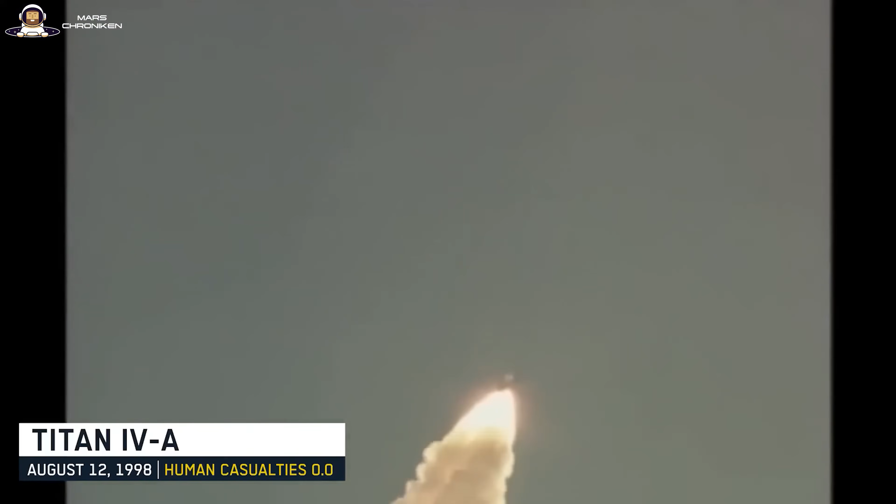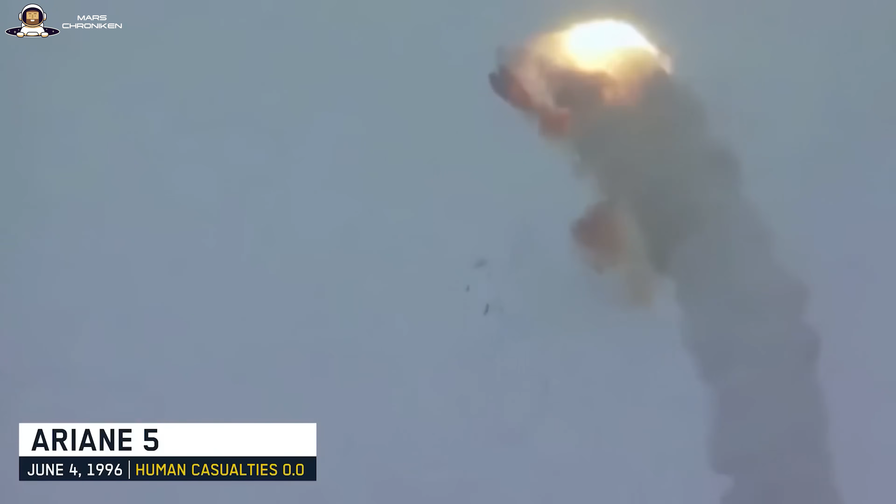If a rocket engine detonates during flight, the mission is usually over. Period. For over 80 years, propulsion engineers have built their careers on this very principle. Combustion chamber instabilities nearly brought down the F1 engine of the Saturn V in the early 60s. Combustion oscillations have destroyed the European Vulcain engines. Thermoacoustic combustion instabilities are the nightmare topic of every thesis at the DLR in Lampoldshausen.

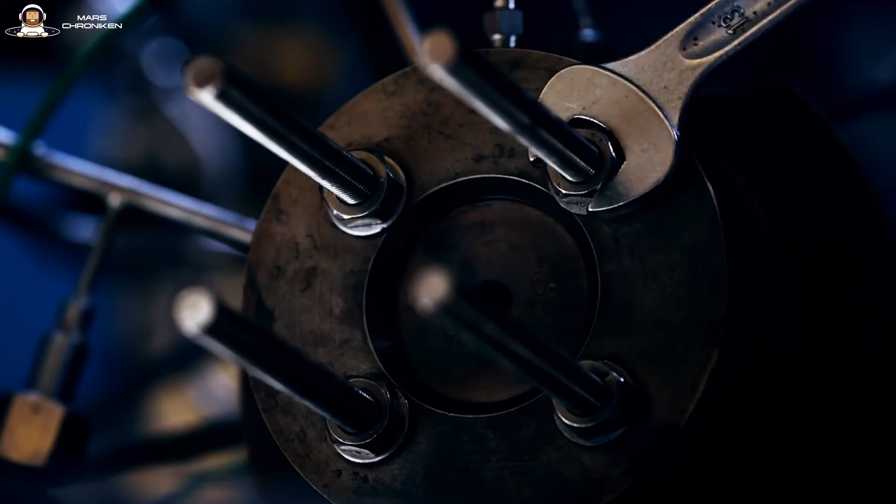If your combustion chamber pressure suddenly jumps by a factor of 20 and the whole thing becomes a pressure wave, then your engine is in 1,000 pieces on the test stand and you have to explain to your supervisor why.

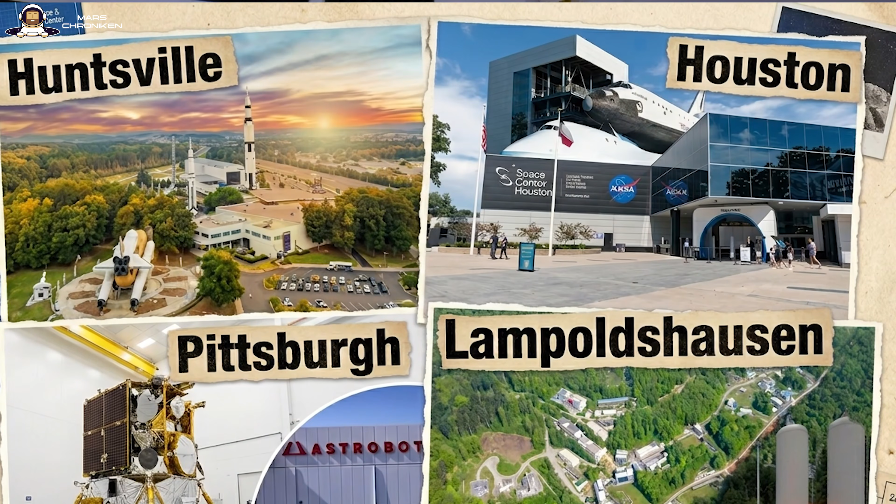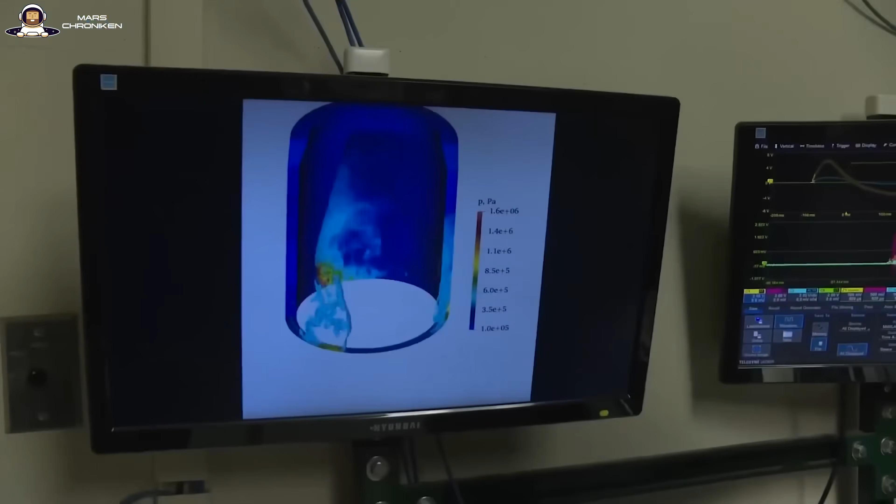And yet today, from Huntsville to Houston to Pittsburgh and Lampoldshausen, some of the best engine engineers in the world are working in front of their screens on rocket engines that keep exploding, and it's completely intentional. With a detonation frequency in the kilohertz range, several thousand shockwaves per second, cleanly circulating in an annular combustion chamber with a diameter of just 68 millimeters. And it works. The technology that the rocket industry wanted to avoid at all costs for 80 years is now well on its way to becoming the most efficient propulsion system of the next decade. And it's coming faster than most people think.

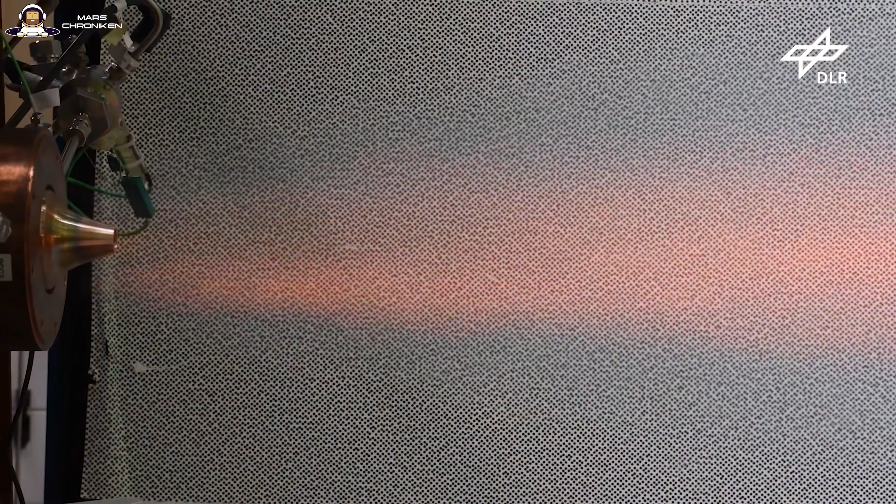In April 2026, just a few weeks before this recording, a single prototype exploded continuously for 300 seconds without taking any damage. A few months ago, the DLR became the first institute in Europe to operate such a detonation combustion chamber with real liquid oxygen and hydrogen. And in May 2025, for the first time in the United States, a rotating detonation engine actually flew.

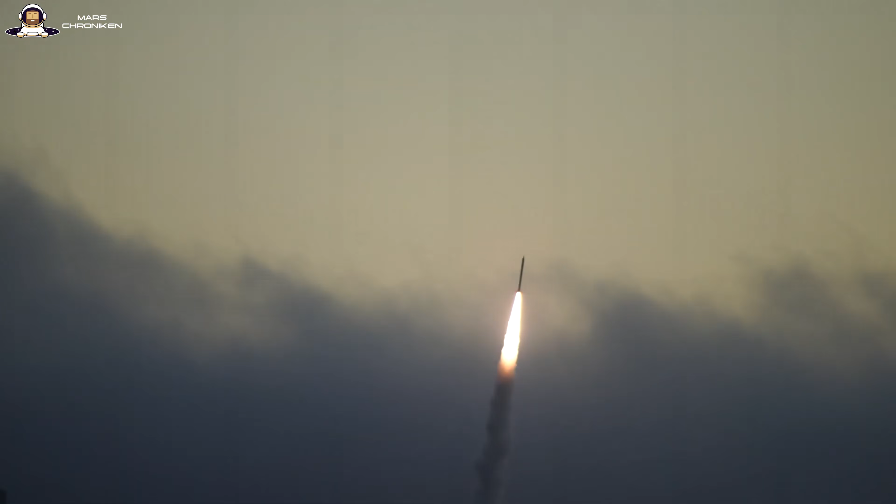Today we're talking about what scientists have considered the supreme discipline of chemical space propulsion since 1959, and what, until a few years ago, no country was able to fully control. We'll dive into the technical details. We compare what the Americans can do, what the Germans can do, what the Japanese have done, and what the Chinese claim. And in the end, I ask the question that really matters, not whether this technology works, but who will fly with it. My name is Serwin, and this is Mars Chroniken.

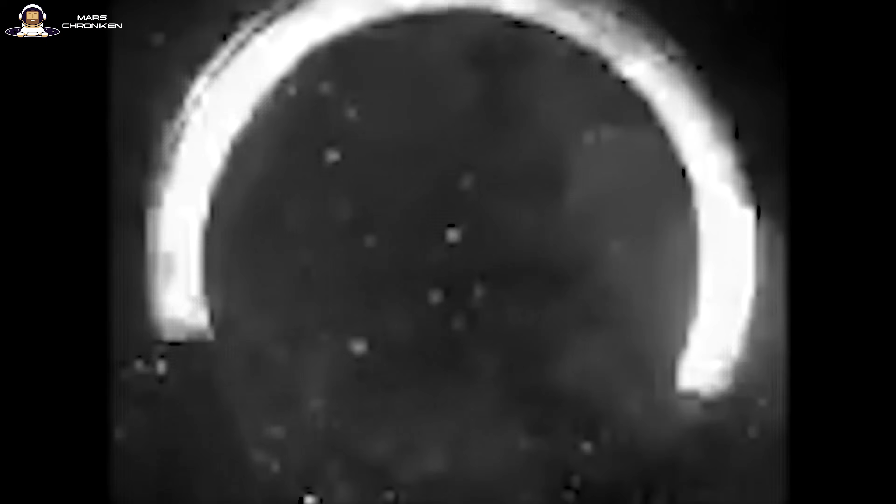The story doesn't begin in Lampoldshausen and not in Cleveland. It begins in Akademgorodok at the Siberian Institute of Hydrodynamics in 1959. A Soviet fluid physicist named Bogdan Voitsekhovskii observes something that should actually be impossible. He manages to get a detonation wave to continuously circulate in a ring-shaped chamber. Not just ignite and dissipate like in a pulse detonation engine, but actually circulate continuously. A quasi-stationary shock that approaches itself, igniting the fresh mixture at the next moment of its own circulation.

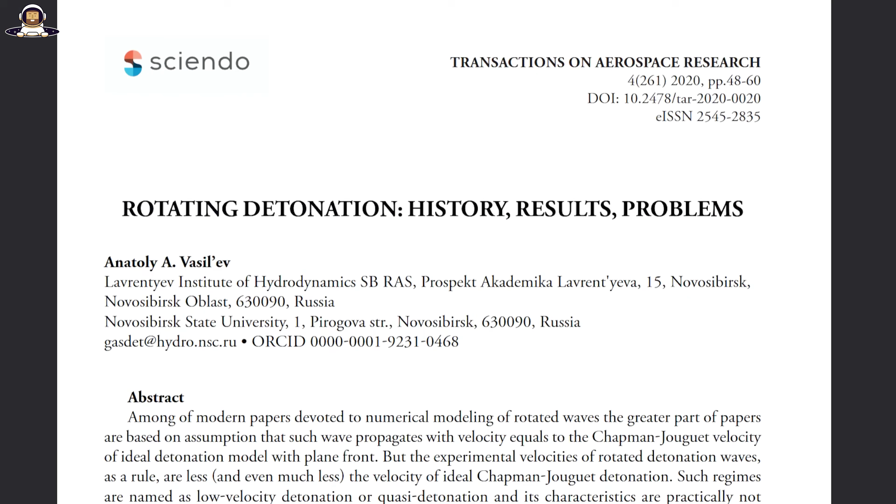The mathematics behind it is fascinating, but the practice is hell. Voitsekhovskii publishes his observations, and for the next 60 years, research groups in Russia, the USA, Japan, Poland, and Germany try to build a working engine based on these observations. They fail. Not just a little, but completely. The detonation dies out. The wave breaks up into deflagration, or the combustion chamber melts. On top of that, the sensors are too slow to understand what's actually happening.

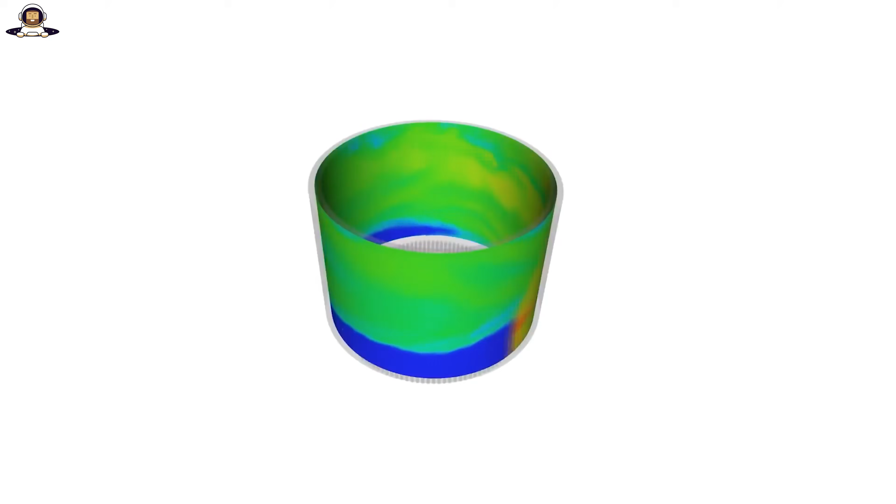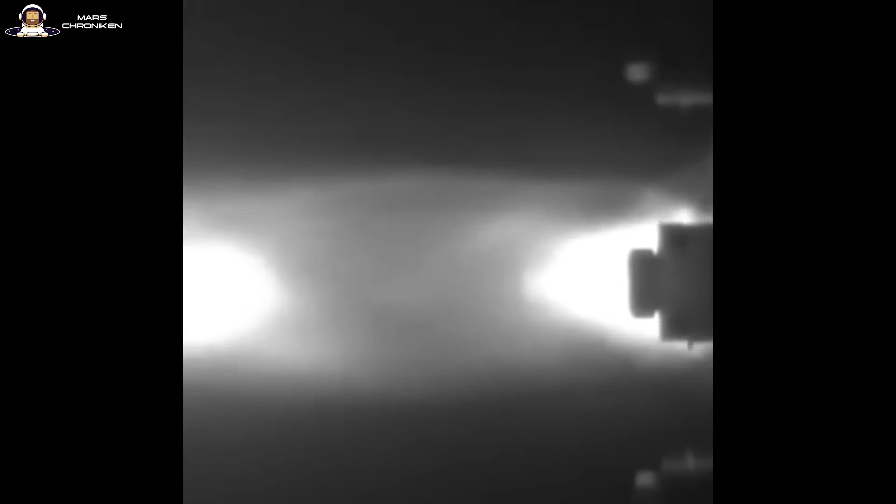High-speed cameras from the 60s could maybe manage 1,000 frames per second. But a modern RDE wave travels around the combustion chamber at several kilometers per second and reaches frequencies in the kilohertz range, in extreme cases up to 100 kilohertz. You need 100,000 images per second just to see what you've actually burned there.

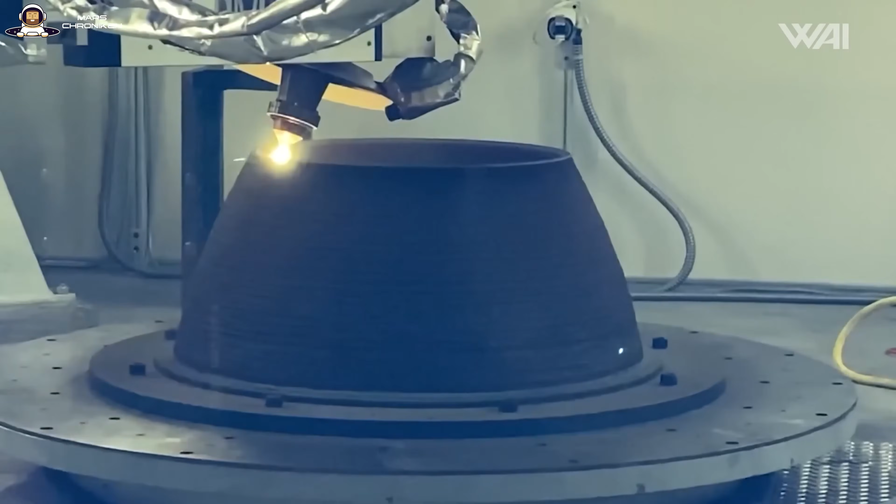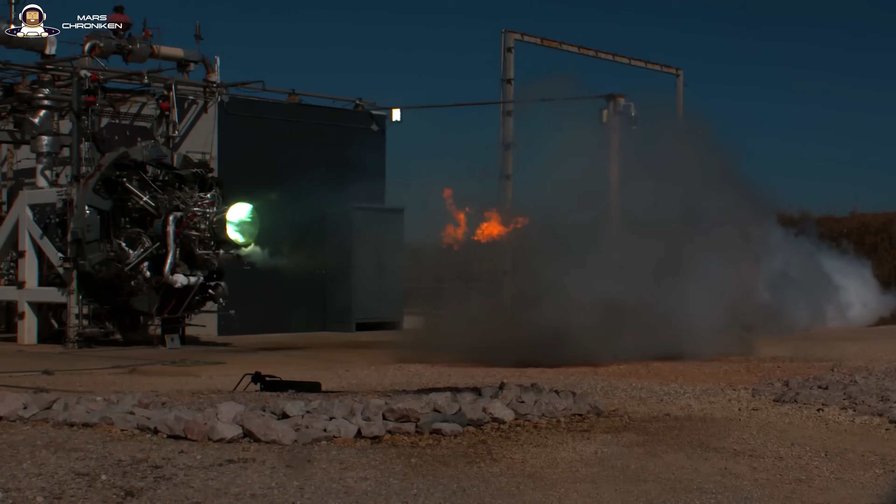It's only in the last 10 years that the game has changed. Three things have happened. One, additive manufacturing, that is, 3D printing in copper alloys and Inconel, which makes it possible to produce such combustion chambers in the first place. Two, new high-frequency pressure sensors that resolve up to 4 megahertz, meaning a pressure reading every 250 nanoseconds. Three, high-speed cameras that no longer blur at 180,000 frames per second. And suddenly, a phenomenon that could only be inferred indirectly for 60 years can actually be observed, measured, and controlled.

Before we take a look at the players, we need to clarify one thing. Why go through all this trouble in the first place? What is so appealing about an engine that is constantly exploding? The answer lies in thermodynamics.

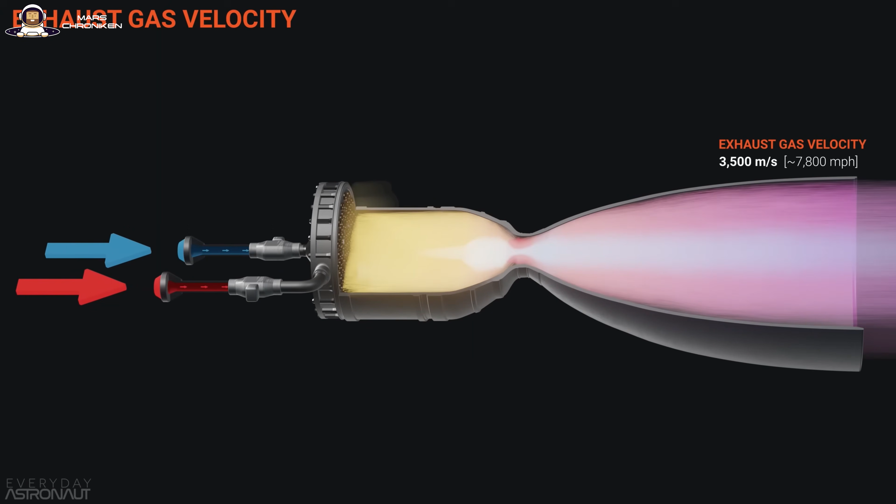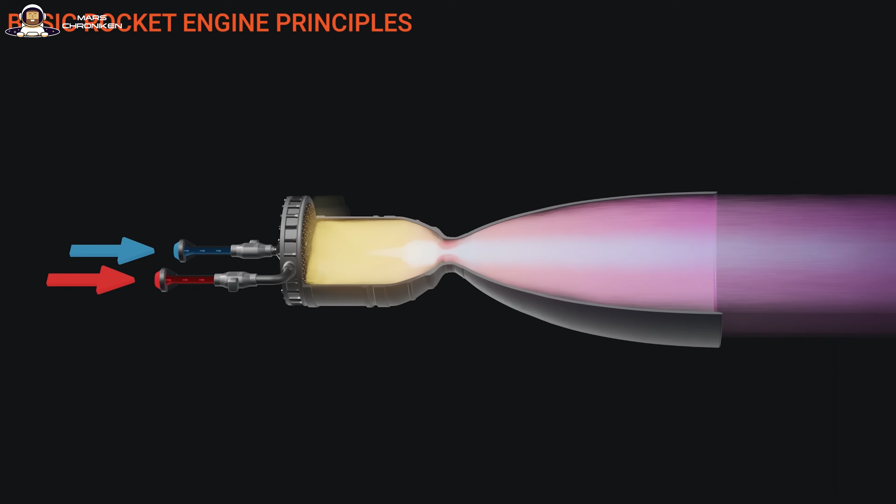A normal rocket engine, meaning everything you've ever seen in a Falcon 9, an Ariane 6, or a Saturn V, operates with deflagration. That's a controlled combustion in the subsonic range at more or less constant pressure in the combustion chamber. The propellants are injected, mixed, ignited, and they react. And the pressure with which everything shoots out of the nozzle at the back is essentially the pressure with which the turbopumps push the stuff in at the front. In fact, you even lose a bit of pressure along the way. That's physically correct, but it's not the maximum.

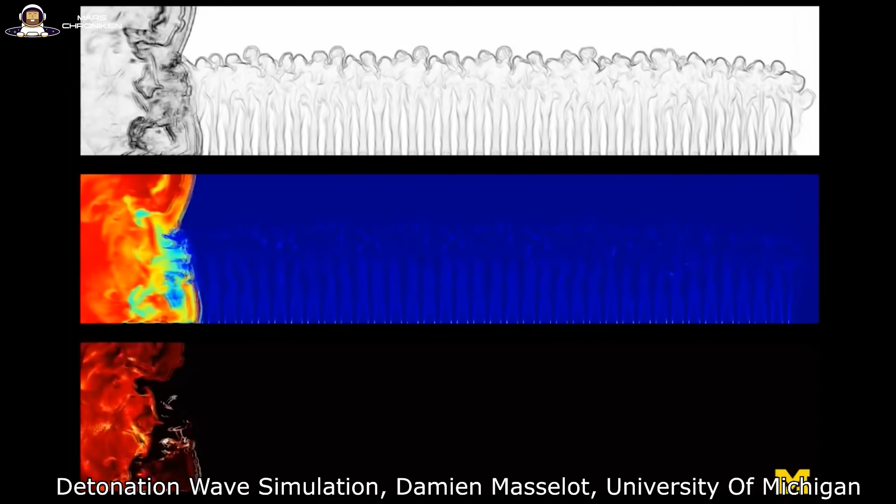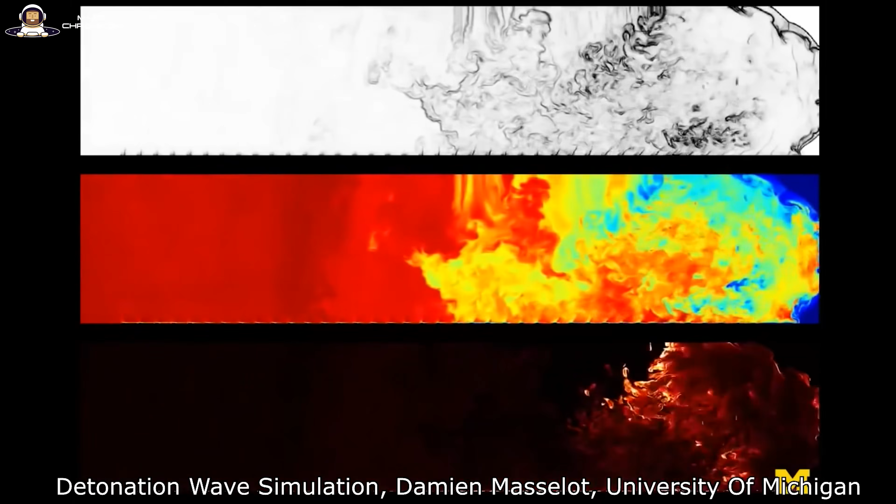A detonation is something different, namely a supersonic shockwave-driven combustion. The flame front moves faster than the speed of sound in the unburned mixture. And that has a crucial consequence. While in deflagration the pressure remains constant or drops slightly, detonation actively builds up pressure.

You gain pressure through combustion. In English, that's called pressure gain combustion. And that's exactly the promise. A rotating detonation engine, or RDE for short, or in the rocket context RDRE, practically captures this pressure gain.

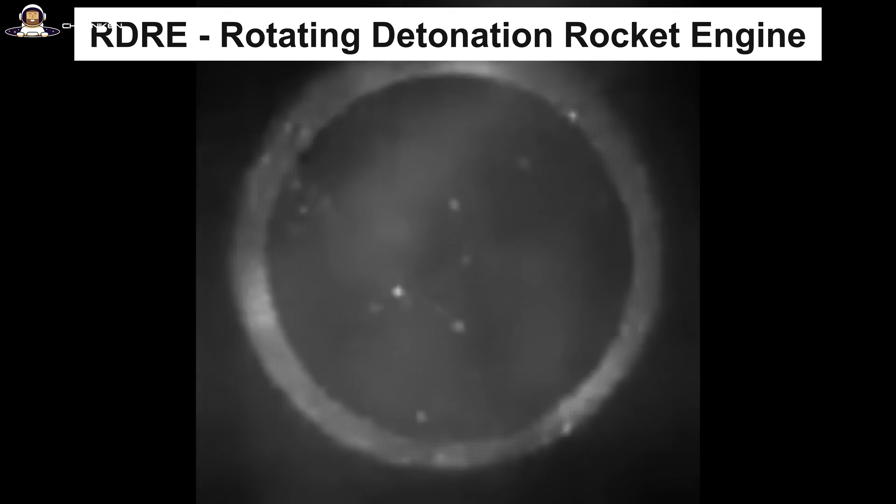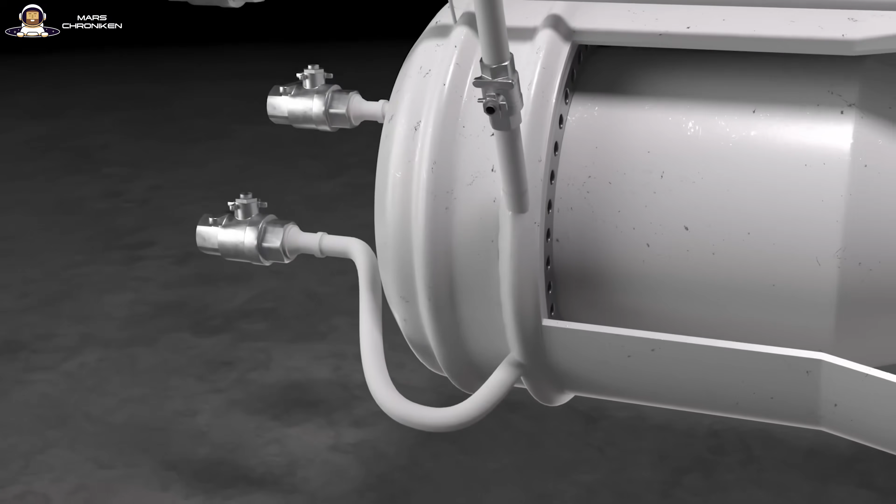The combustion chamber is an annular gap, two concentric cylinders with a few millimeters of space in between. On one side, the propellants, typically hydrogen and oxygen or methane and oxygen, are continuously injected. You ignite it once externally with a so-called pre-detonator. And if everything goes right, a detonation wave starts and circles around in the annular gap several thousand times per second. Every time it passes a spot, fresh fuel mixture has accumulated there, which is ignited by the passing shockwave, feeding and sustaining the wave.

Hot, highly compressed gas comes out at the back and is expelled through a nozzle to produce thrust. Sounds crazy? It is. But the theoretical increase in efficiency is tempting. A much-cited study, led by John Bennewitz at the Air Force Research Laboratory and published in Scientific Reports in 2023, estimates the realistic gain to be on the order of 10% more thrust with the same fuel consumption.

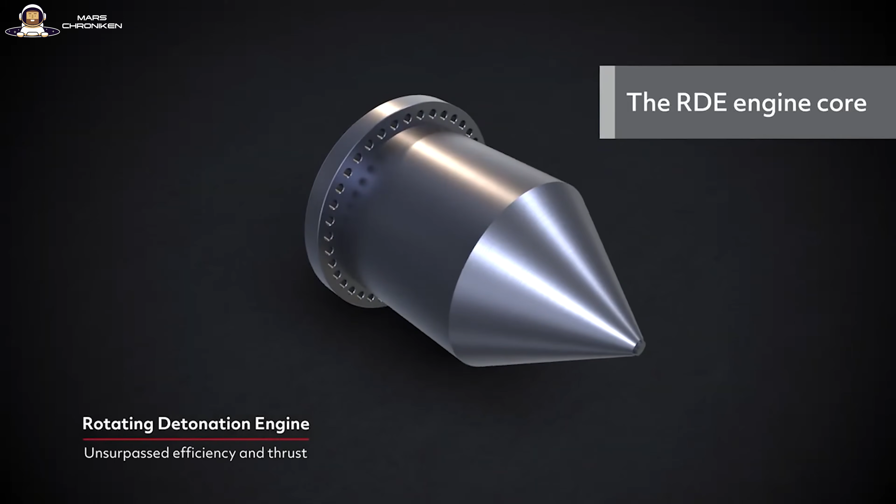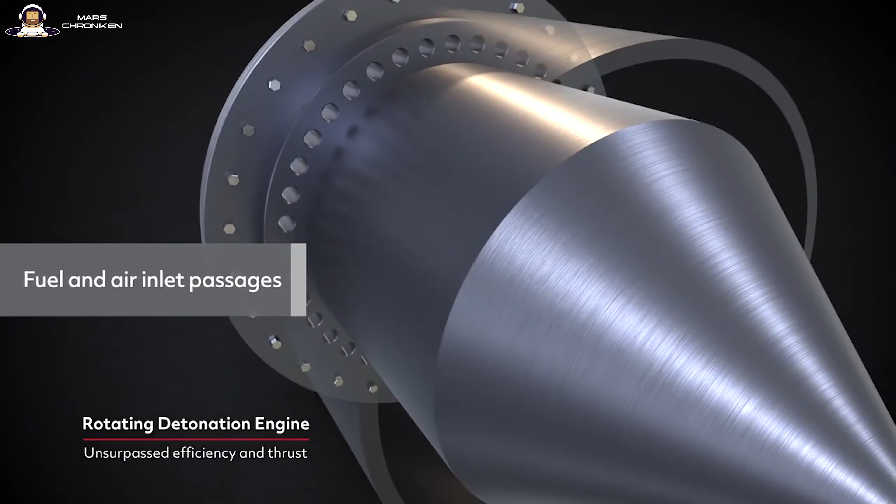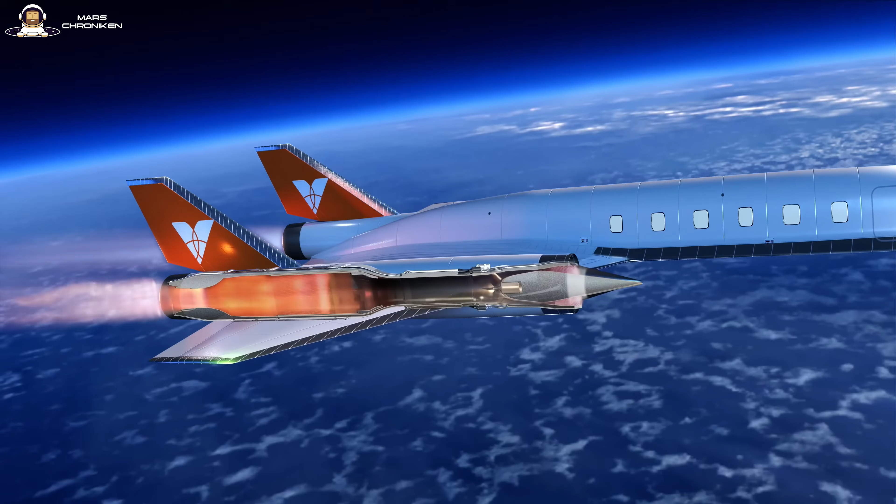In addition, there are smaller combustion chambers, lower required injection pressures, less susceptibility to classic combustion chamber instabilities, and a significantly smaller construction volume. In a world where every kilogram in the tank and every cubic centimeter of combustion chamber costs money, that's tempting. And if you combine that with a ramjet, which is an air-breathing jet engine for hypersonic flight speeds, then suddenly you not only have a better rocket engine, but also the theoretical key to a passenger jet that accelerates from a normal runway to Mach 6.

A small company from Houston, Texas is working on building exactly that. We'll get to that in a moment, but the first to show that these detonation rings actually work in reality weren't NASA, but the Japanese.

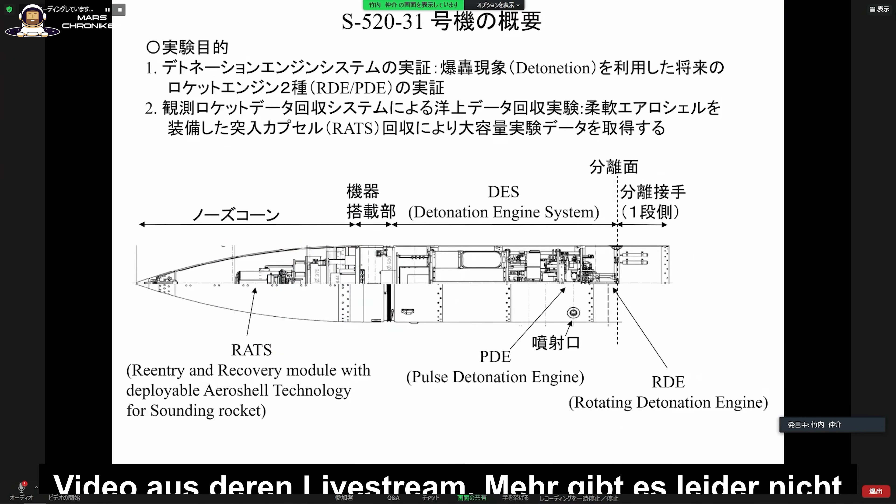On July 27, 2021 at around 5:30 a.m. local time, an S-520 sounding rocket was launched from the Uchinoura Space Center on Kyushu Island. A configuration with classic solid fuel in the first stage. But in the upper section, there's something new: a detonation engine system built by a research group from Nagoya University, together with Keio University and the Muroran Institute of Technology, led by detonation physicist Jiro Kasahara.

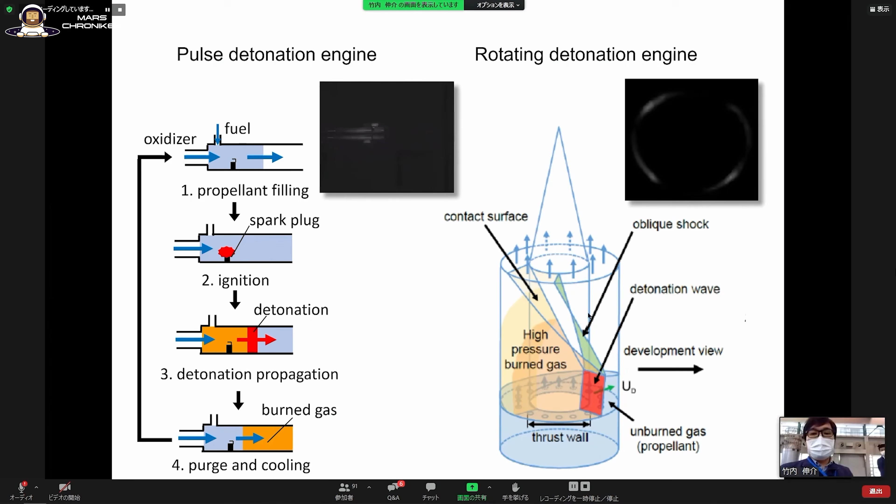After the separation of the first stage, the crew ignites the rotating detonation engine in actual vacuum. Methane and oxygen, gaseous, 6 seconds of operation, about 500 newtons of thrust. Pressure data, temperature data, and even video recordings are sent to Earth via telemetry and recovered from the Pacific using a small return capsule called RATS. It's the world's first detonation engine ever to run outside the atmosphere.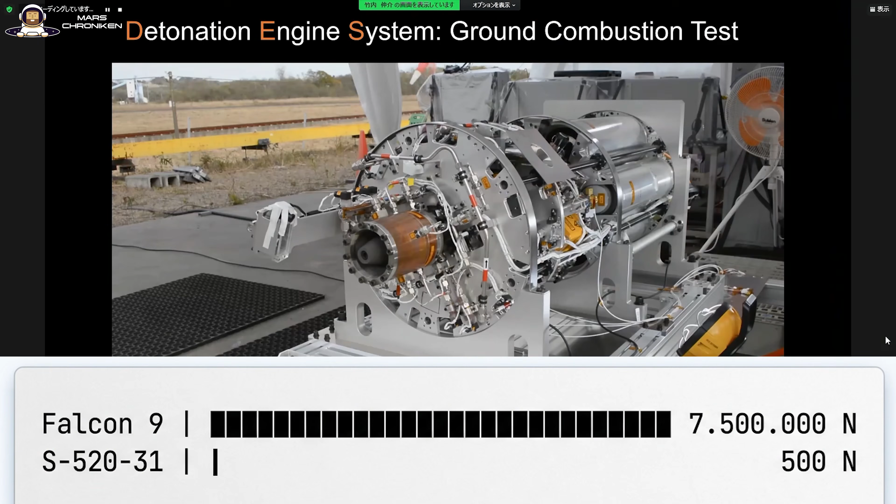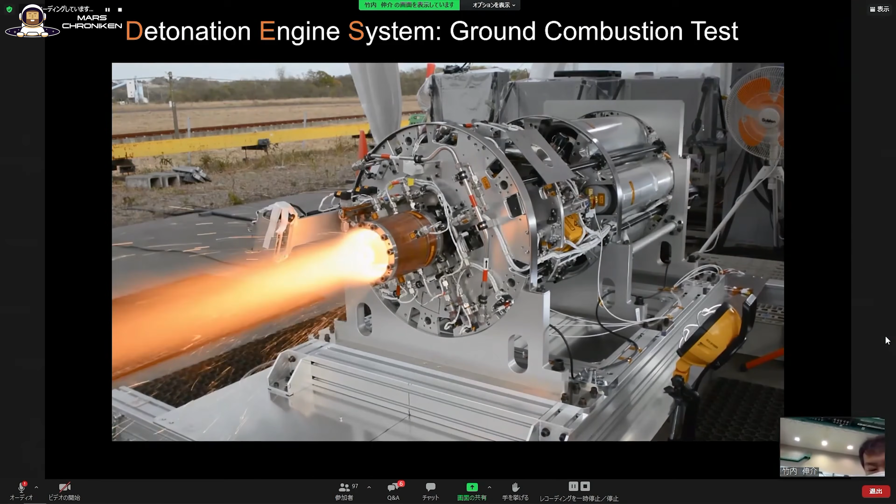500 newtons isn't much. A Falcon 9 has a total of 7,500,000 and many times more thrust than the Japanese experiment. But that wasn't the point. The point was to show that the physical principle works in space. That's very typical for Japanese spaceflight: quietly, thoroughly, without a PR machine, but technically they're right at the forefront.

The Americans took longer, but then they came with force.

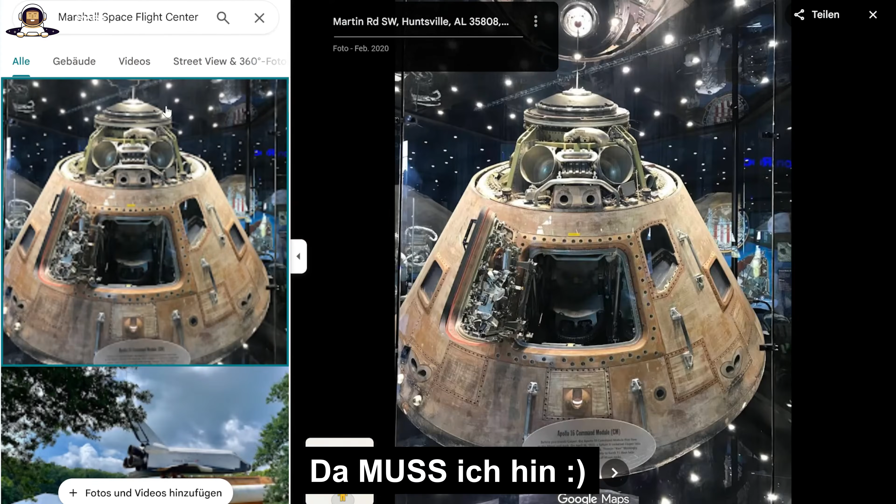Let's continue. The center of NASA activity is the Marshall Space Flight Center in Huntsville, Alabama. At the center sits a combustion devices engineer named Thomas Teasley, who leads the RDRE test program, funded through the game-changing development program of the Space Technology Mission Directorate. Two tests define the current state of the art in the US to this day.

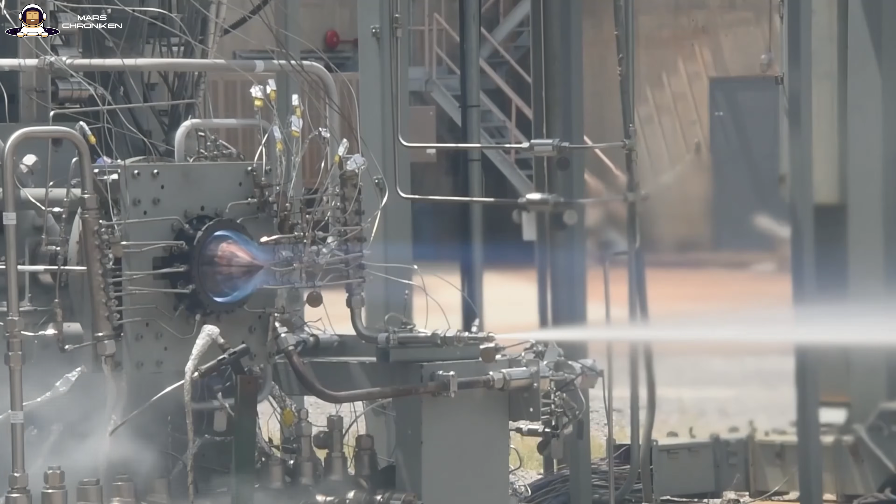The first was in the summer of 2022. A 3D printed rotating detonation combustion chamber made from a copper alloy developed by NASA itself, called GRCop-42, manufactured using the powder bed fusion process in cooperation with InSpace LLC and Purdue University in Indiana. The thing produced over 4,000 pounds of thrust for almost a minute at a chamber pressure of 622 psi. According to Marshall, that's the highest documented chamber pressure for such a configuration. An initial hardware demonstrator result that showed additive manufacturing really is the key.

GRCop-42 is a high-performance copper alloy with excellent thermal conductivity, which through additive manufacturing allows for the geometric complexity required by such a combustion chamber.

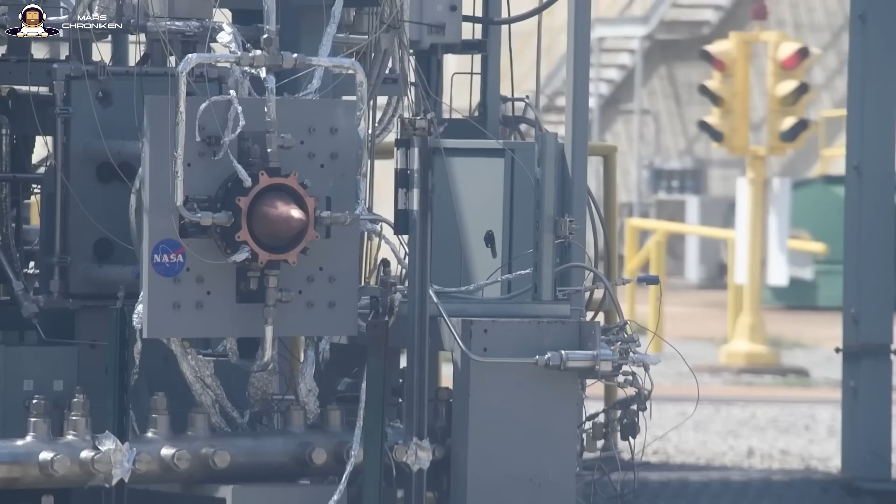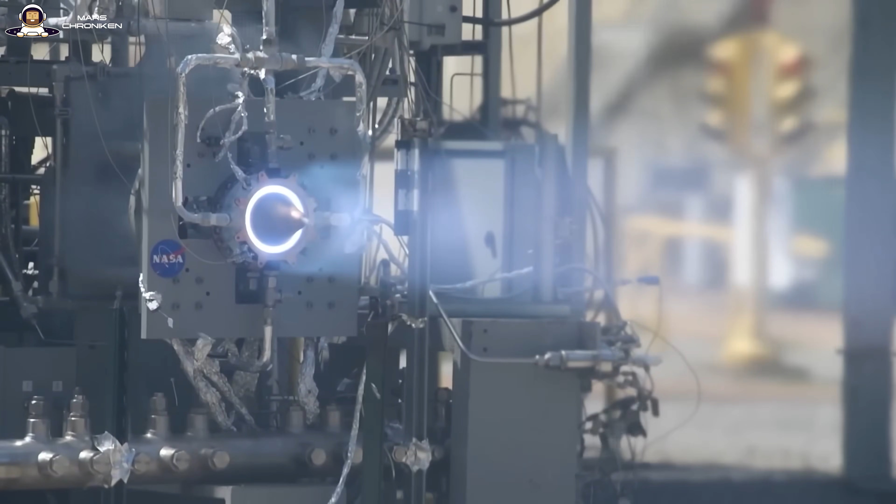The second test was the shocker. On September 27, 2023, Marshall fired the same engine type for 250 seconds, over 4 minutes straight, with over 2,600 kilograms of thrust. That's a burn time profile that roughly matches a typical lunar landing braking maneuver, or a Mars transfer burn. In other words, NASA has demonstrated that this technology is no longer just a phenomenon lasting seconds in the lab, but is now operating at scales where real missions can be conducted.

Meanwhile, the Marshall program is planning the next stage: a technology demonstration mission with a combustion chamber assembly in the 10,000-pound class. That's a bit over 4,500 kilograms of thrust, coupled with a real methane-oxygen turbopump with a gas generator.

That's no longer basic research. That's preparation for a flight-capable propulsion system.

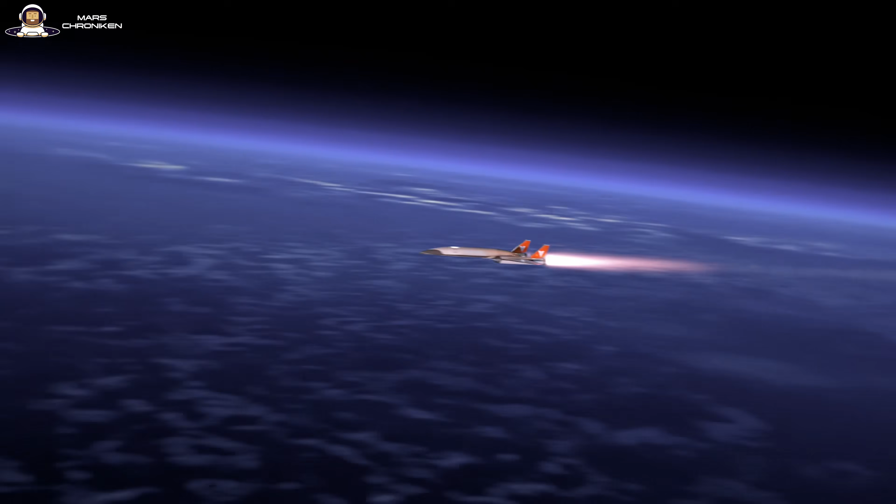Their vision is a Mach 4 passenger jet called Stargazer M4, which takes off from regular airports and connects Los Angeles to Tokyo in under 2 hours. That's ambitious in a way that would have been ridiculed as a pipe dream in the 90s.

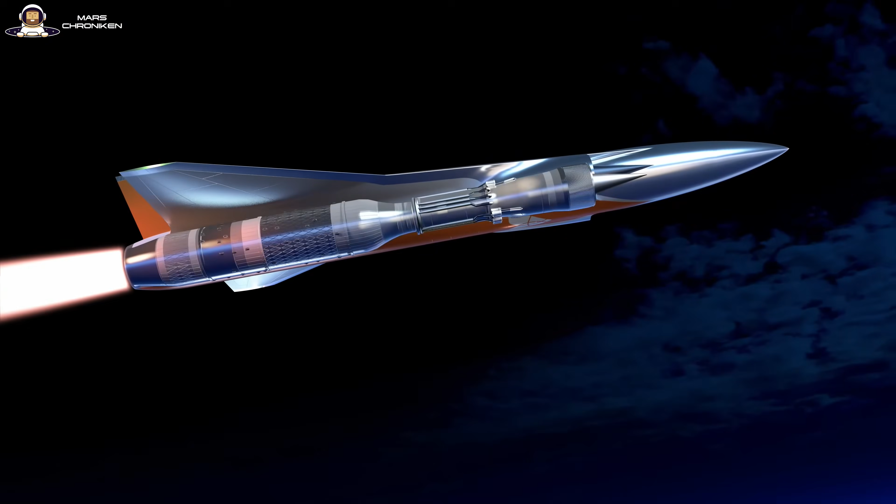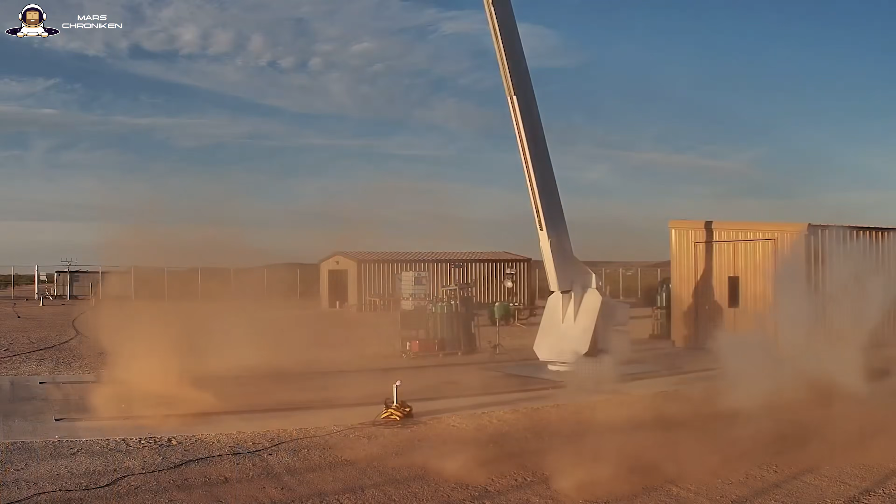On May 14, 2025, they delivered something that no one would have expected just 12 months earlier. Venus Aerospace launched a small rocket with a rotating detonation engine on board from Spaceport America in New Mexico, in the desert south of White Sands. 3 to 5 seconds of vertical ascent, 1,340 meters in altitude, a maximum acceleration of 4 G. And crucially, the engine was recovered almost undamaged after the flight. It was the first flight test of an RDRE in the United States, and according to the company, probably the first such flight ever worldwide, if you exclude the Japanese configuration as a low-thrust research facility.

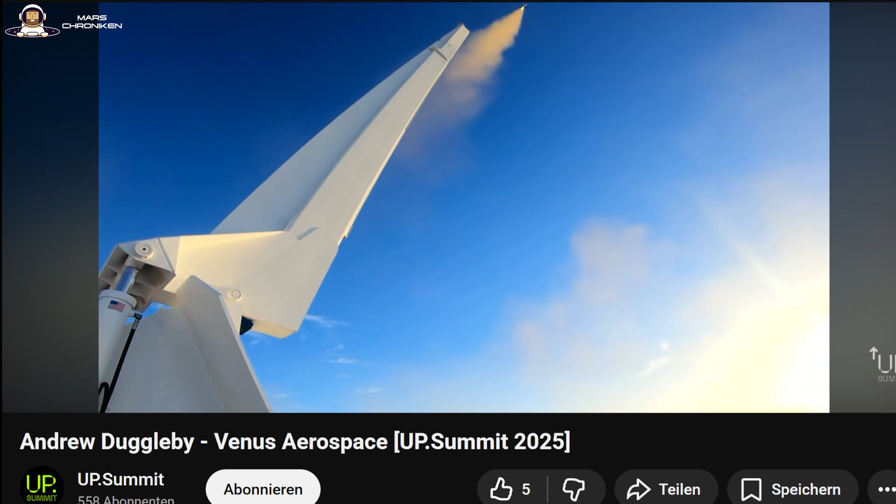This means the detonation engine has finally moved out of the laboratory. Andrew Duggleby, the CTO, said a sentence after the test that will keep the industry busy for a while: essentially, the rotating detonation engine has been a theoretically attractive thrust gain for decades, and Venus has overcome the final critical hurdles to finally realize this theoretical gain in hardware. Whether that's completely true will have to be shown by scaling, but as a vehicle demonstration, it's a milestone.

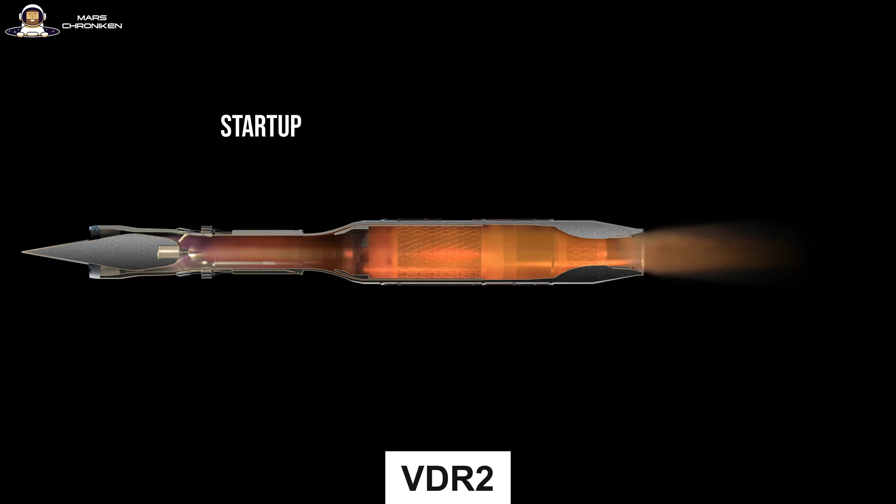Venus itself is aiming to combine it with its in-house air-breathing detonation Ramjet VDR-2, with the goal of a Mach 6 vehicle without an external booster stage. It's still a long way to go until then, but May 2025 was the proof that the core is real.

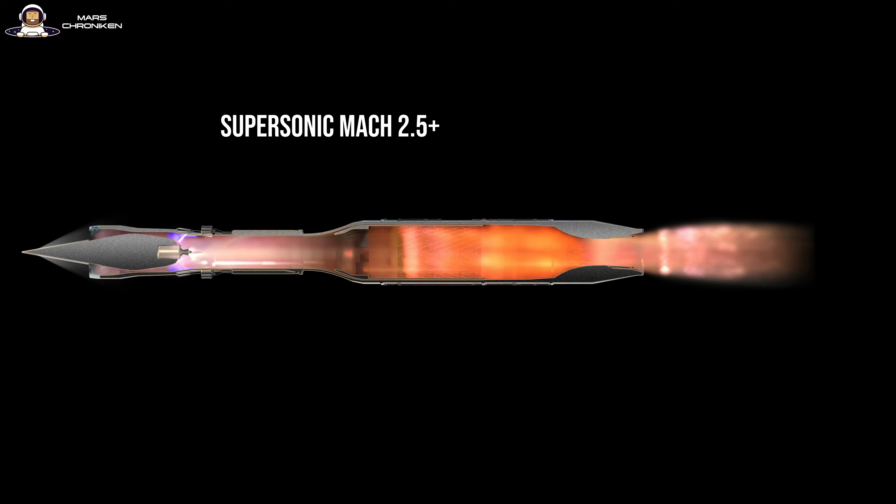You need to know the second private company, because just a few weeks before this recording, it broke a world record.

On April 23, 2026, Astrobotic Technology from Pittsburgh announced the completion of a test campaign at the NASA Marshall Space Flight Center. The engine is called Chakra, named after the disc-shaped throwing weapon from Indian mythology, which is a fitting name considering the ring geometry of the combustion chamber.

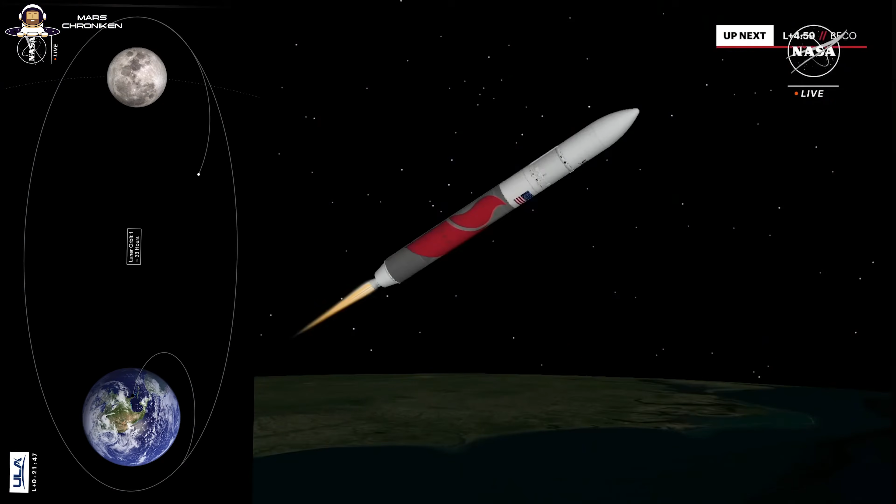Astrobotic is best known for the Peregrine mission. In January 2024, the company became the first US private firm to launch a lunar lander, but the mission failed due to a valve defect in the propulsion system, before Peregrine could even reach the moon. A painful lesson, but it didn't knock Astrobotic out of the game. Instead, they took the outcome as an opportunity to ramp up propulsion development internally.

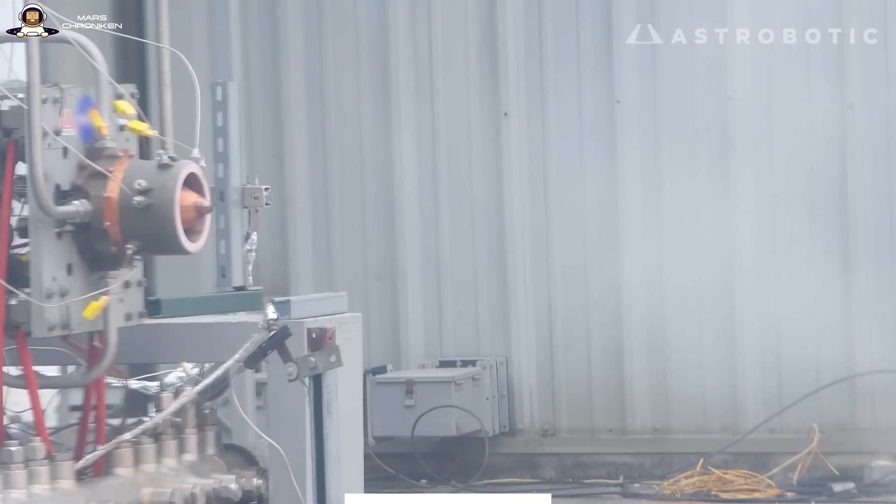Chakra is part of this answer. What Chakra delivered in April 2026 is of a completely different magnitude than anything else so far. Two prototypes have accumulated over 470 seconds of burn time in 8 hot fire tests, including a single uninterrupted run of 300 seconds. According to all relevant observers, including NASA, this is the longest continuous hot fire run of a rotating detonation rocket engine in history.

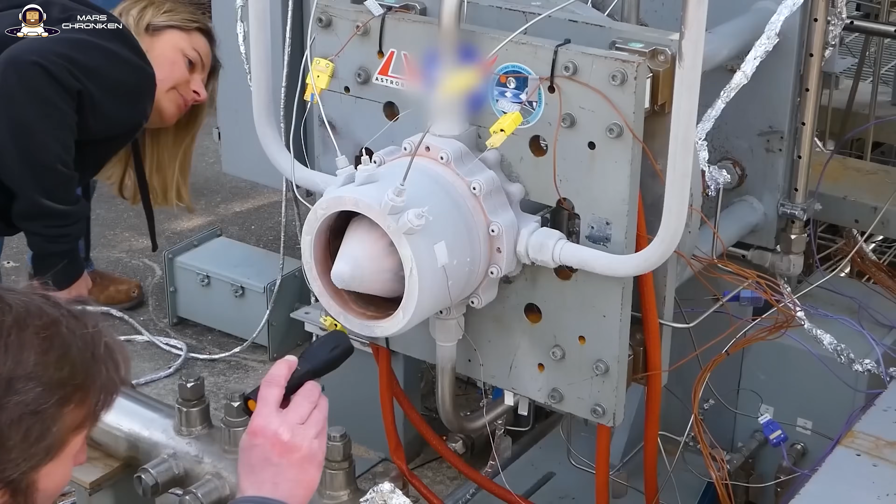Each prototype produced more than 1.8 tons of thrust, and both engines reached what's called thermal steady-state conditions. That means the engine ran long enough for the temperature distribution in the combustion chamber wall to stabilize and stop increasing. That's the thermal equivalent of true continuous performance. After the test, both prototypes were inspected without any visible damage.

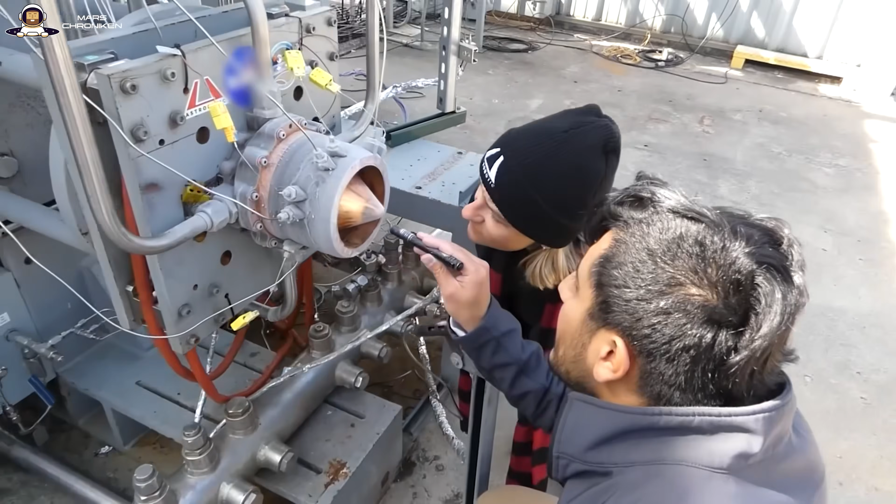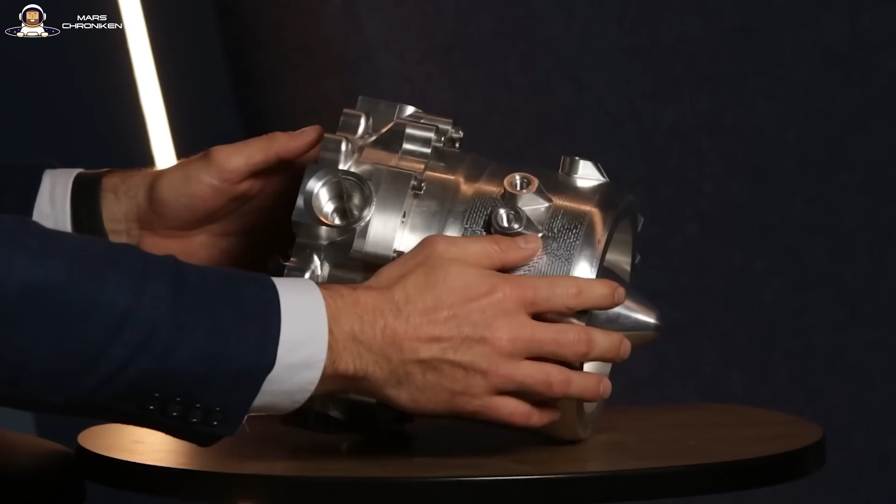Brian Avalos, principal investigator of the Chakra program at Astrobotic, summarized the result in a statement that I would like to quote because it sounds honest: essentially, with any cutting-edge technology like an RDRE, there is always the concern that unknown factors will emerge in the transition from design to actual testing, which could throw everything off. However, the engine actually performed even better than expected, and the 300-second run was the icing on the cake. That's a refreshingly calm way of saying that something worked that normally doesn't work.

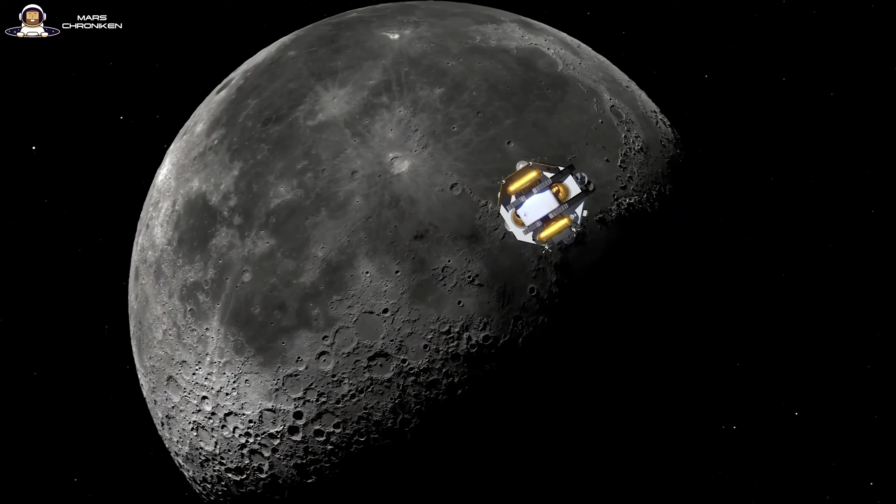Astrobotic wants to integrate Chakra into several commercial platforms. On one hand, into future versions of the Griffin lunar lander, which is larger compared to Peregrine and is actually intended for cargo missions at the lunar South Pole. On the other hand, into a series of reusable suborbital launch vehicles based on the designs that Astrobotic acquired in 2022 from the bankrupt Masten Space Systems, namely Xodiac and Xogdor.

Please write in the comments how to pronounce that correctly.

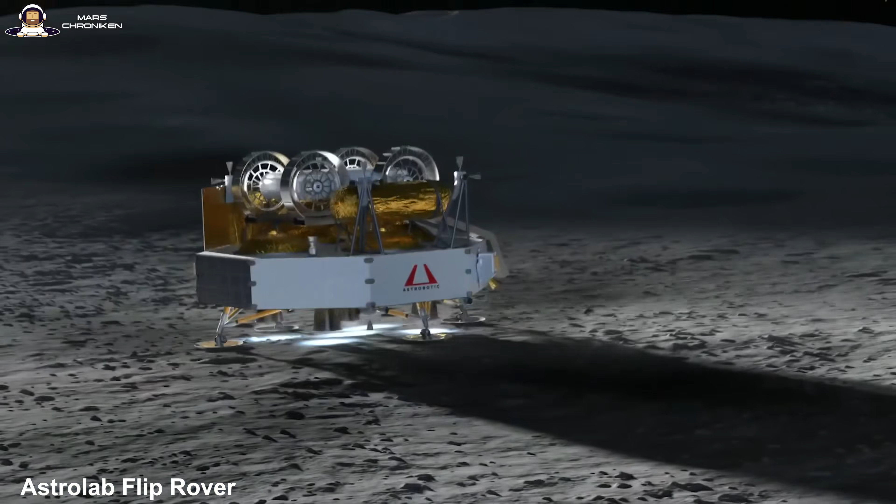But also into an orbital transfer vehicle for operations in cislunar space, that is, between Earth's orbit and the Moon's orbit. Chakra was funded through NASA's Small Business Innovation Research contracts and a Space Act agreement with Marshall. According to Astrobotic, the next development cycle will focus on regenerative cooling, meaning engine cooling using the propellant itself, on throttling, that is, controlled thrust regulation, and on mass reduction. The classics, right? Those are the three things missing to actually fly Chakra on a lunar mission.

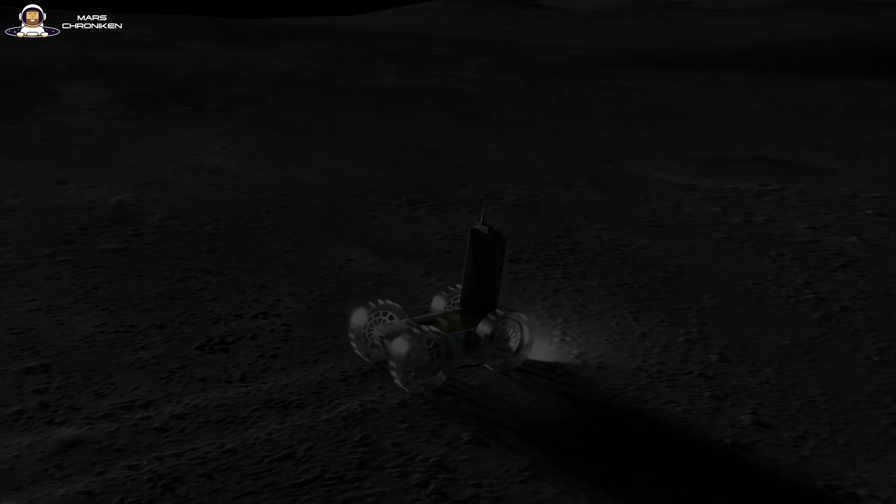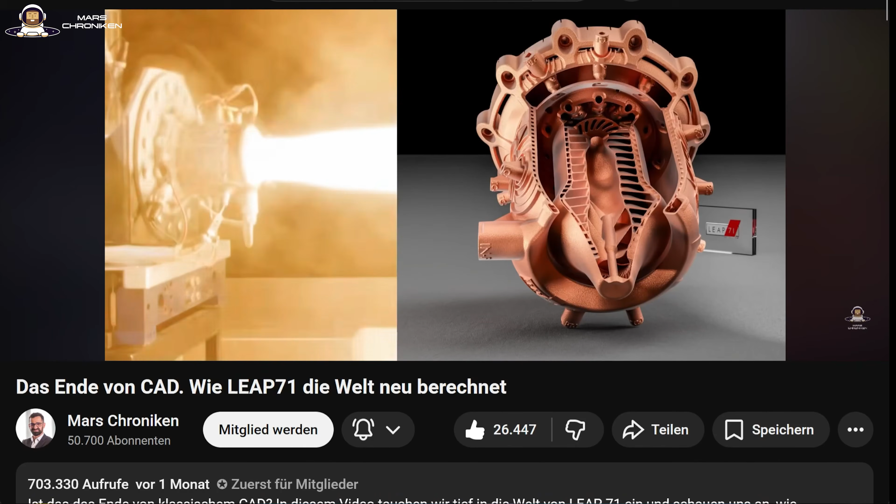What you shouldn't overlook here is the underlying manufacturing technology. Astrobotic talks about tunable porosity metal additive manufacturing, an additively manufactured combustion chamber structure with specifically adjusted porosity in certain wall areas, optimizing heat management and detonation stability at the same time. That's the same phenomenon that played the main role in our LEAP 71 video a few weeks ago. Computational engineering and 3D printing are merging into the actual propulsion discipline of the next generation, and combustion chambers are no longer drawn by designers, but designed by algorithms and manufactured by printers.

So, that's enough about the American side. If you just read the headlines, you might get the impression that the US is developing RDE technology on its own, and Germany is at best watching from the sidelines. That would be wrong. In fact, the German Aerospace Center at the Lampoldshausen site has been making some of the most significant European contributions to rotational detonation research for over a decade. And in March 2026, something happened there that few people in the United States took notice of.

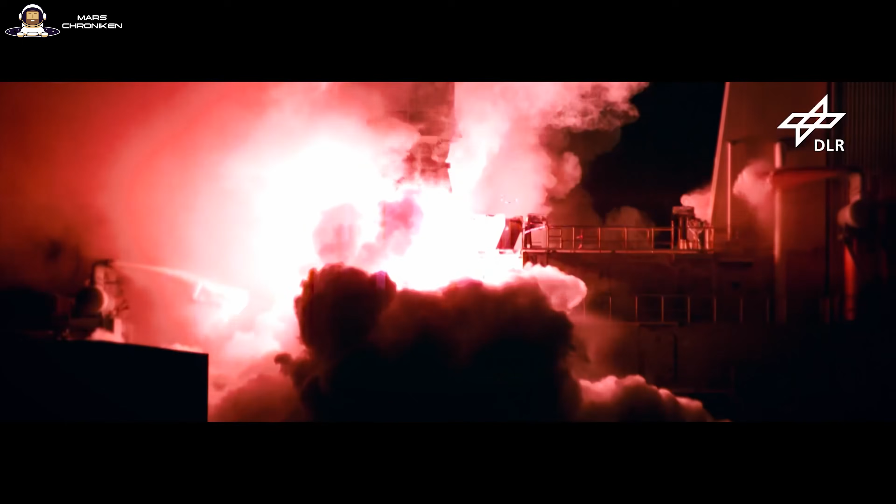Lampoldshausen is a term that means little to outsiders, but for engine engineers, it is almost mythical. Every European rocket engine development process of the last decades has at some point gone through Lampoldshausen, says Jan Deeken, the head of the local DLR Institute for Space Propulsion. Vulcain, Vinci, Aestus, and Prometheus, and in the future, rotational detonation.

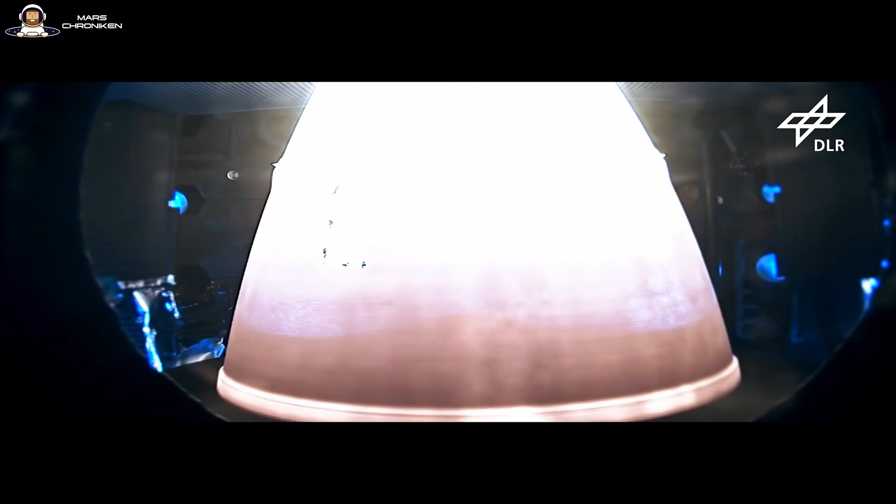The test stands M3.1 and P8 are smaller, highly instrumented research facilities where detonation research is conducted. About 100 hot runs have been carried out there in recent years with an RDE configuration, mainly with hydrogen and oxygen, as was the case in the Astrobotic story.

Gaseous methane and oxygen, the mass flows vary between 15 and about 250 grams per second. So these are deliberately small-scale research engines whose purpose is not to fly a rocket, but to understand the phenomenon physically. The combustion chamber in Lampoldshausen is a capacitively cooled ring construction made of a copper alloy, with an outer diameter of 68 millimeters.

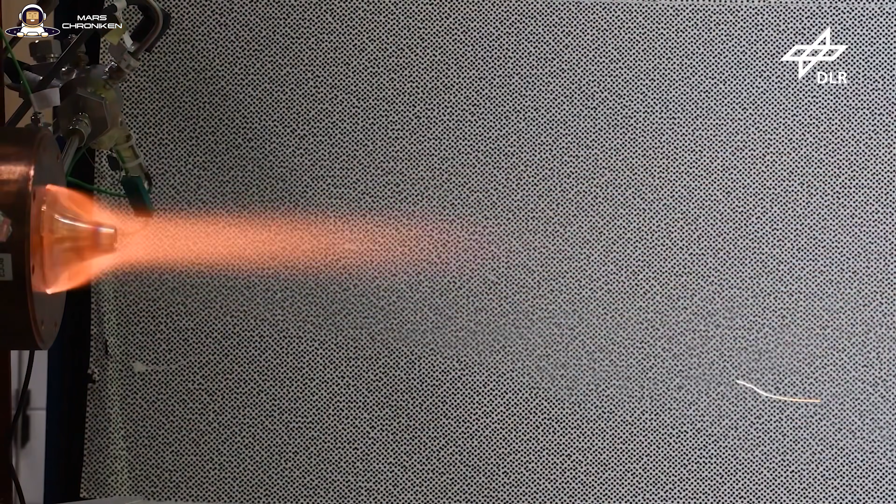Capacitively cooled means it has no active cooling channels, but instead acts purely as a heat reservoir. This works very well, but it has the disadvantage that the test times are limited to about 1.5 seconds before the wall gets too hot.

In this short time, the detonation wave circles the combustion chamber several thousand times, and the DLR measures this with pressure sensors that resolve up to 4 MHz, combined with high-speed cameras at 180,000 frames per second.

In November 2025, the Lampoldshausen team published a paper in the CEAS Space Journal about a functional hydrogen-oxygen pre-detonator. This is the ignition prechamber, which is flanged radially to the main combustion chamber and where the initial detonation wave is generated before it passes radially into the actual annular space.

That sounds like a detail, but it's actually the core problem of the entire RDE technology. Without reliable, reproducible ignition, everything else is just theory. DLR Lampoldshausen now has one of the most difficult subsystems in the entire field built and working.

And then on March 19, 2026, about 2 months ago, DLR delivered something that is considered a small sensation in European engine research. For the first time in Europe, a rotating detonation engine was operated with real liquid oxygen. So no longer with gaseous oxidizer, but with cryogenically liquefied oxygen, just like it is used in every real rocket engine.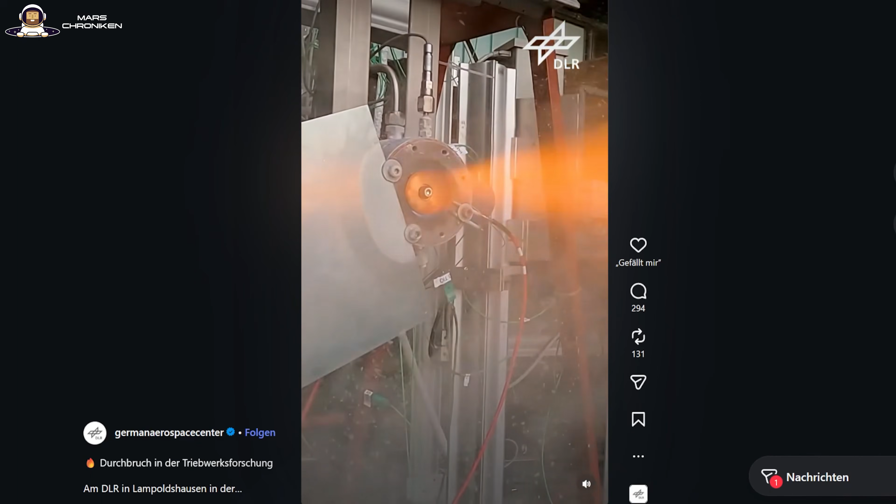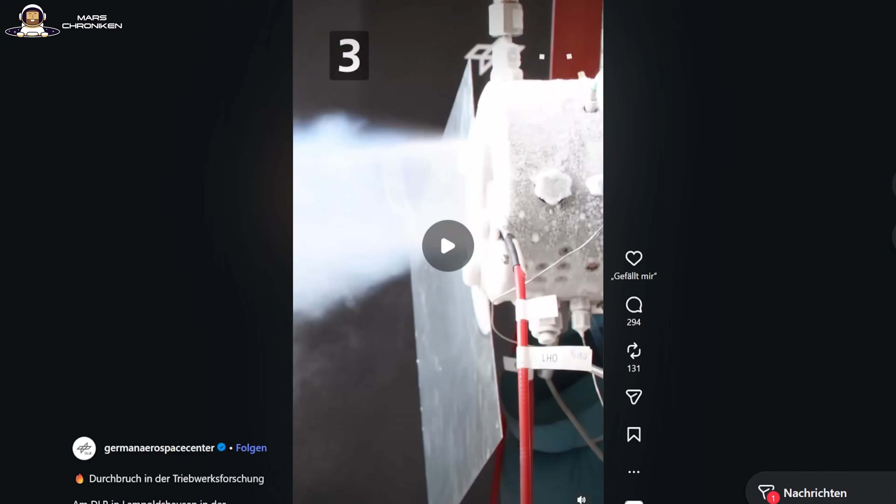The oxygen was gradually cooled down to about minus 183 degrees Celsius, and the detonation waves stabilized. The DLR wrote in its Instagram post from the 19th that under these, quote, extremely realistic conditions, rotating detonation waves are generated that release energy particularly efficiently. The run lasted about 5 seconds.

Before we put this into a political context, we need to briefly look at 2 other nations that complete the picture: China and the American defense budget.

For me, China is still difficult to assess in the RDE sector, because most publications either come in the form of press releases that cannot be independently verified, or appear in Chinese professional journals whose methodology sections are significantly less transparent than Western standards. With appropriate caution, there are 2 claims.

First, a group from the National University of Defense Technology stated in May 2025 that they had run an RDE test stand trial lasting over 600 seconds, with an ethylene-oxygen fuel combination in a hypersonic wind tunnel environment. If that's true and could be independently verified, it would be significantly longer than the Western standard.

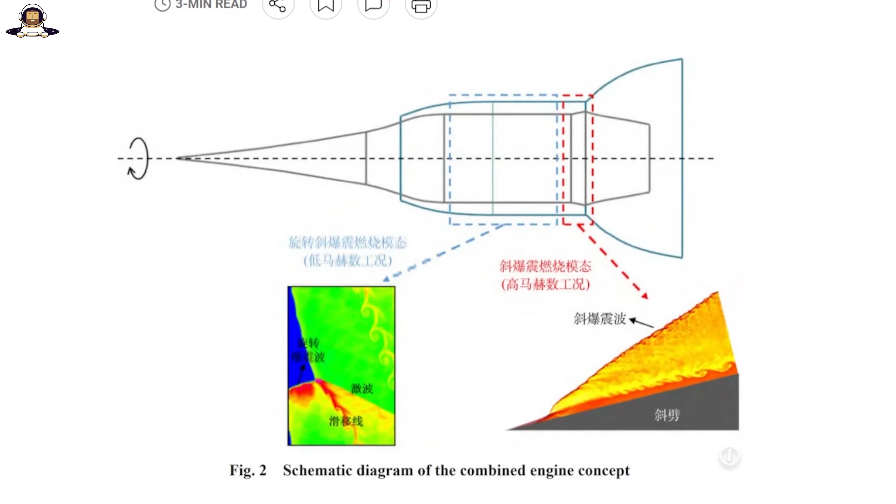Secondly, a group at the Beijing Power Machinery Institute published a concept in December 2023 that aims to couple a rotating detonation with a so-called oblique or slanted detonation in a 2-stage hypersonic engine, which would theoretically work until Mach 16. So far, it's just a paper, with no hardware validation as far as is publicly known.

What can be stated is China is structurally very active in the RDE field, especially in areas close to the military, and treats the technology as a key technology for the next generation of hypersonic weapons, not as a civilian spaceflight option.

In the United States, DARPA has launched the Gambit program together with RTX, a company that was formerly known as Raytheon. Gambit explicitly targets air-launched standoff supersonic weapons, meaning cruise missiles that are dropped from an aircraft and then independently fly to a target at supersonic speed.

The Air Force Research Lab in Edwards and Wright-Patterson is simultaneously advancing the purely military line. If you ask where the money in the US comes from that has brought RDE technology up to the pace we're seeing in 2026, the answer is very clear. From the Pentagon. The civilian NASA application benefits from it, but it's not the driving force.

That's a truth the European space community doesn't like to deal with. The DLR research in Lampoldshausen is scientifically excellent, but it's also scientifically designed, meaning it's aimed at gaining knowledge and not at an industrial scaling route.

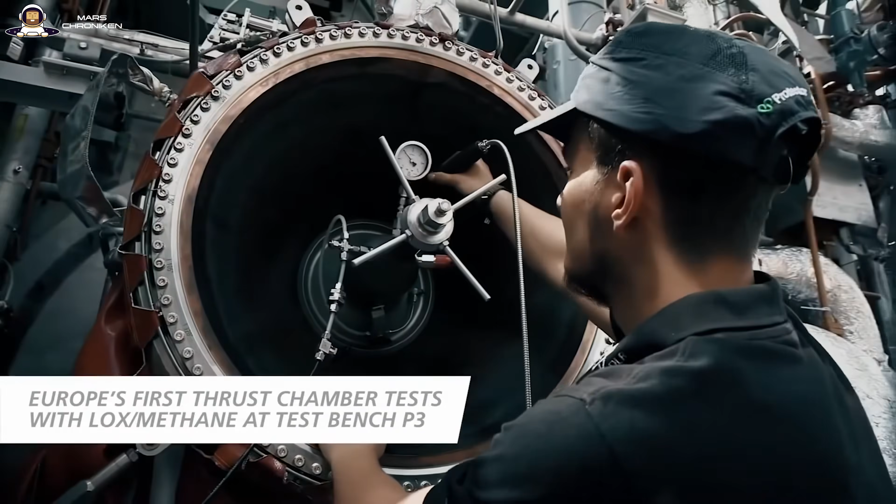There is no Ariane Group contract in Germany that would include an RDE engine in the roadmap of a future European launch vehicle. Prometheus, the current European demonstrator engine, is a classic methane-oxygen combustion chamber with pump-fed propulsion. No detonation engine. If we're honest, Europe has excellent basic research, but no industrial policy vehicle that would translate this research into a flight hardware program.

At this point, it's worth taking a step back and making an honest assessment. What can RDE, RDRE really do, and what can't it?

The real efficiency increase compared to the current state of the art, according to the most reliable study so far, the already mentioned Bennewitz work from Scientific Reports 2023, is on the order of up to 10%, more thrust with the same amount of fuel.

That's significant, but it's not revolutionary. It's not the promise of tripling that you find in some tabloid articles. It's the kind of magnitude where an established engine engineer would say, that's worth it, if the effort is right.

The really attractive aspects are more the secondary ones. Smaller combustion chambers, which in a lunar lander stage means more volume for fuel or more payload.

Lower required injection pressures reduce the complexity of the turbopumps, and there's less susceptibility to the classic, acoustically driven combustion chamber instabilities that make every engine developer go grey.

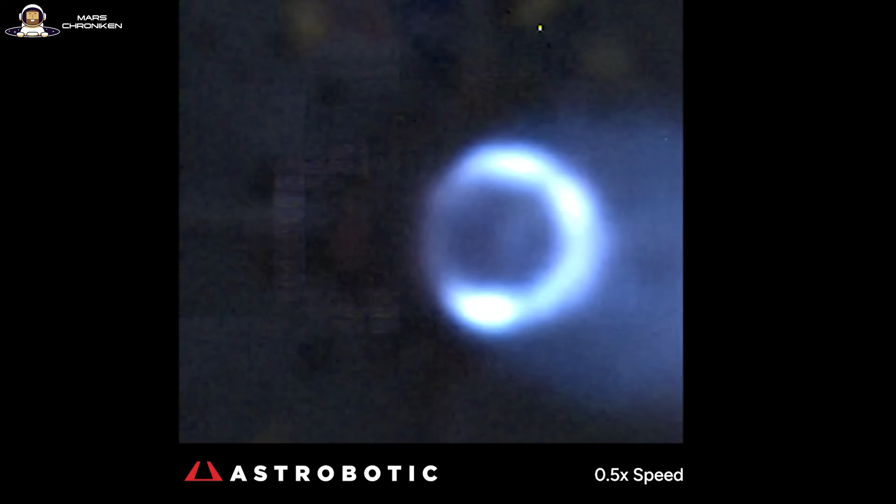The more compact design plays a role, especially where volume costs more than mass, such as in cruise missiles, suborbital demonstrators, and potentially in upper stage engines that need to be integrated into launch vehicles.

What RDRE is not is a finished propulsion system. The open problems are real and they are tough. Regenerative cooling is still in its infancy.

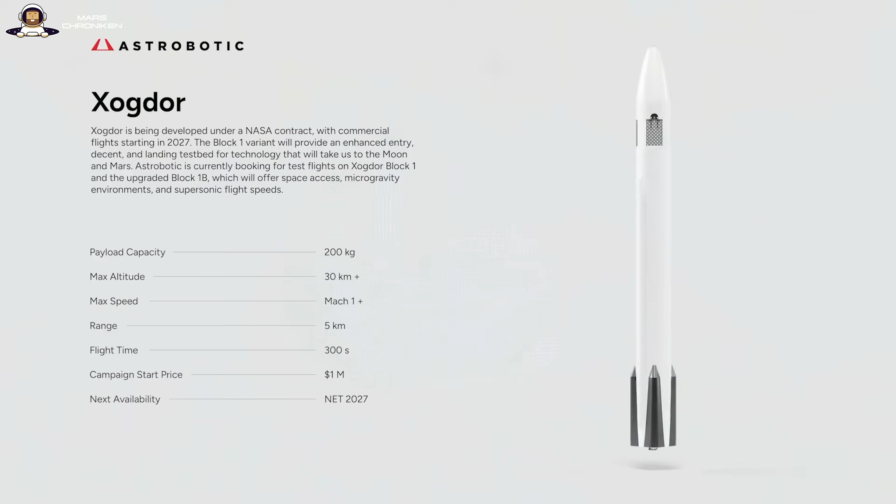Thrust control or throttling is not trivial with a detonation wave that has to stabilize itself. Gimbal control, meaning the mechanical swiveling of the engine for rocket attitude control, is basically simple with the low combustion chamber masses, but untested in integration.

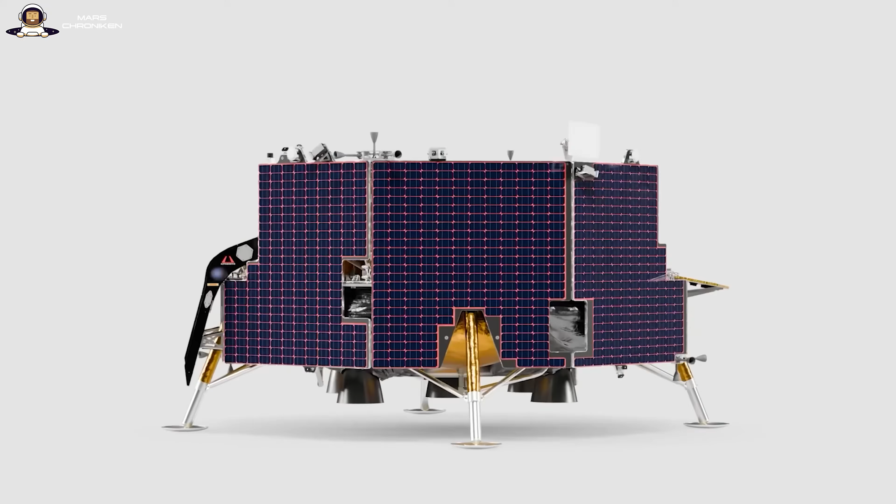And above all, integration with real turbopumps, which deliver high mass flow rates at high pressures, is the next big hurdle. The NASA TDM project is aimed precisely at this integration, with a methane-oxygen single-shaft turbopump and a combustion chamber in the 10,000-pound class. If this really works, then we're talking about the first real RDRE on the path to a flight-ready configuration.

Right now, we're still in the demonstration phase. What remains is the strategic question: who will win the race?

If you honestly assess the situation in May 2026, the United States is in a position that seems unbeatable for a certain subsystem. NASA Marshall has reached the validation stage for civilian technology. Venus Aerospace has delivered the first flight. Astrobotic holds the endurance record. DARPA has the money and the military mission. Air Force Research Lab handles the long-term research. That's a 4 or 5 tiered value chain that doesn't exist with this density in any other country.

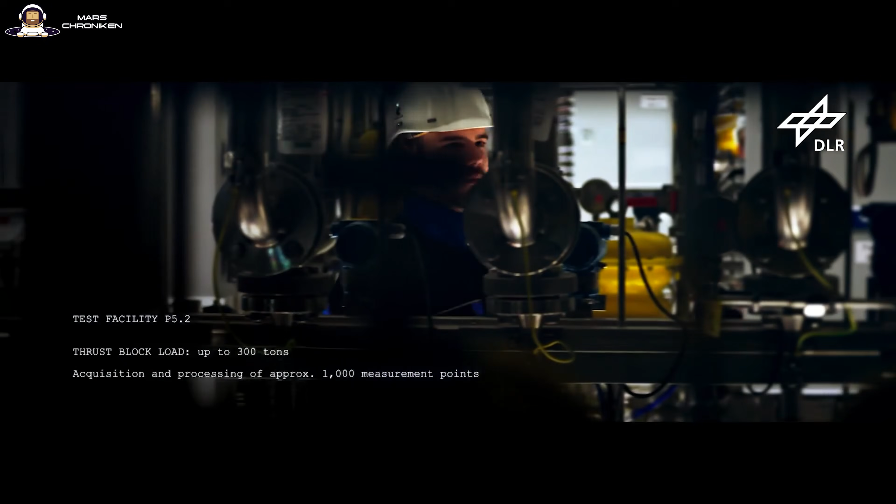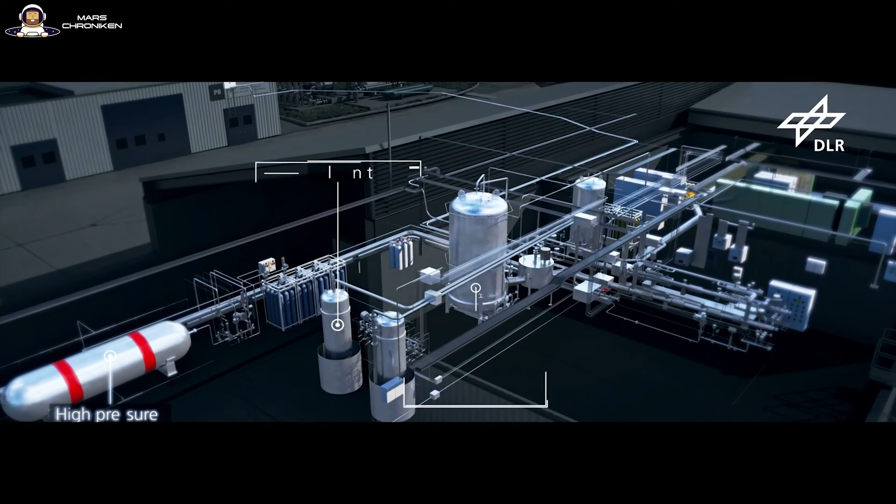Germany and Europe have something that the US doesn't necessarily have in one place, namely the scientific depth and methodological rigor that are necessary for a truly understood technology. What Europe lacks is an industrial policy path that translates this depth into an operational program - an ESA variant that would say, in the next 10 years, we will build a flight-capable RDRE for the upper stage of Ariane Next, or for a European reusable lunar landing system. There is no such roadmap, and as far as I know, it is not in preparation either.

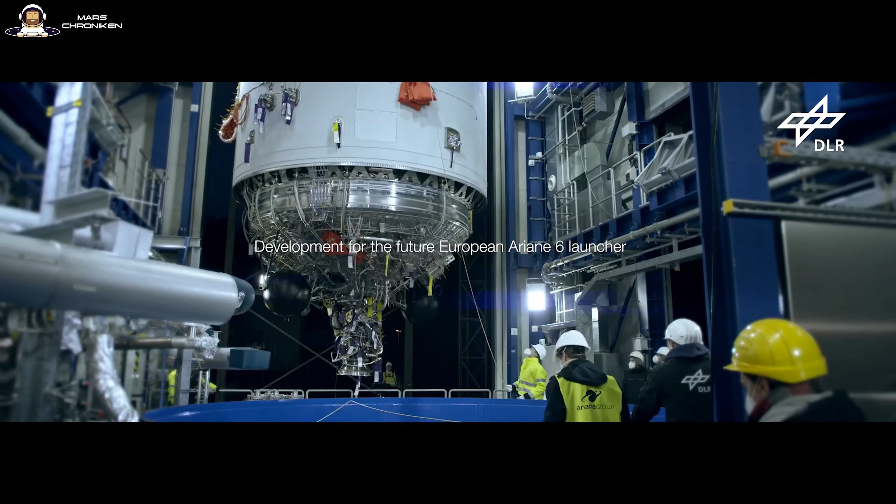What does exist are excellent DLR publications, small test stand campaigns, and the first liquid oxygen test in Europe, and the quiet knowledge that DLR Lampoldshausen would be the next partner in any serious European program.

But no program. China is taking probably the most controversial, but also the most strategically sober path. They are investing in RDRE technology primarily for hypersonic weapons development and secondarily for civilian applications. And the dividing line between the two is thinner there than in the US, and non-existent compared to Europe.

What comes out of the Beijing Power Machinery Institute as a Mach 16 concept paper will show up as a hardware demonstrator somewhere in a facility within 2 years, and we probably won't be able to confirm the existence of that facility until long after the test. This is a game with different rules, and it will change the Western perception of technology once again.

Japan is the quiet pioneer that made the first flights and plays the central validating role in scientific literature. Probably in a few years, when the first commercial use of RDRE is applied in a lunar lander or a hypersonic demonstrator, people will look back and realize that Kasahara's group in Nagoya in 2021 was actually the starting point.

No one knows today who will win that. The likelihood that the first flight-capable operational configuration will come from the US is high, because money, vision, and validation are all there at the same time. The scientific depth is carried by Germany and Japan, and the fact that China is already further ahead in secret than public literature suggests is part of an honest risk assessment.